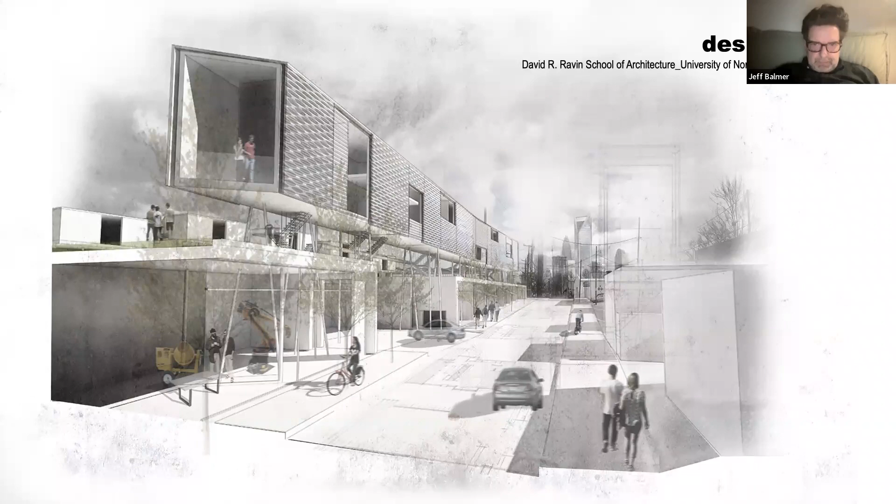Today we're going to hear from the Design Lab, co-directed by Chris and Peter Wong. Chris is a professor of architecture and co-director of the Design Lab. He's also president of the ARCC, and served as the school's director from 2009 to 2020. He holds a Master of Science in Architecture from Columbia and a Bachelor of Architecture from the University of Oregon. His research focuses on the mutually constructive relationship between environment and culture. Peter Wong is an associate professor who teaches architectural design, history, and theory, and has been here since 1988.

He's also a licensed architect in the states of Pennsylvania and North Carolina. He's the coordinator of the third-year studio these days, and received degrees from the University of Washington and the University of Pennsylvania. His current research investigates spatial perception in domestic interior realms, utilizing eye tracking hardware and software to reveal areas of visual attention in housing environments. The Design Lab was established in 2016 as a design research space in the School of Architecture, an extension of the school's curricular and community research efforts. It's a venue where faculty and students collaborate on innovative design issues aiming to advance contemporary professional, theoretical, and technical problems facing architecture today. Design Lab is supported by research funds and grants, and special collaborations that afford a variety of investigative projects, from housing to school design, and from competitive research to creative problems. A large part of its efforts is to generate design ingenuity through creative works such as competitions, lab projects, and published writing, allowing lead faculty and student assistants to collaborate in ways that combine the school's research and educational agenda.

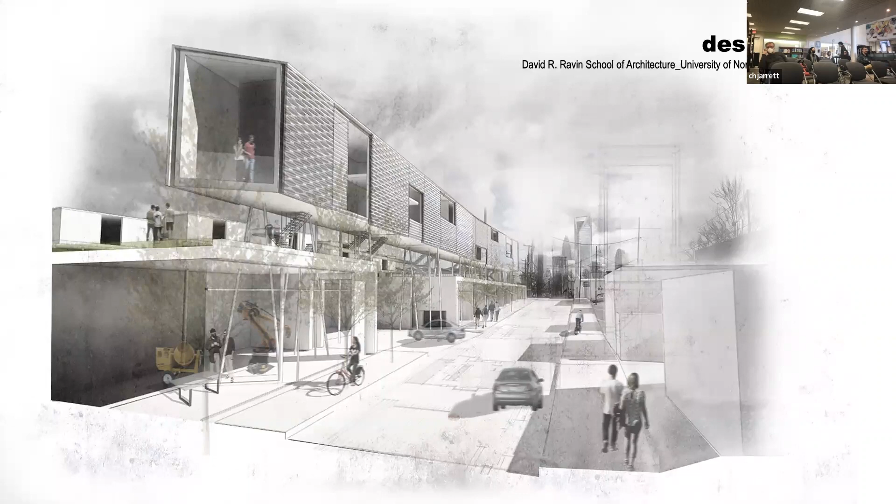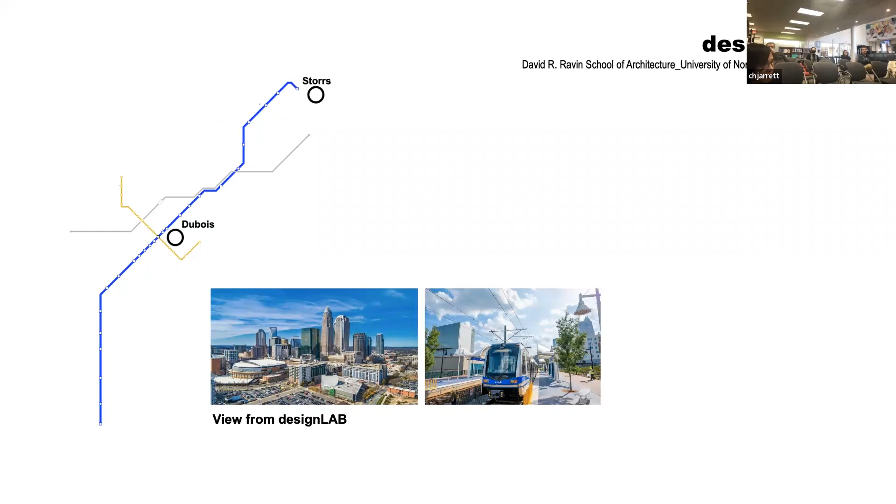The Design Lab is located 25 minutes southwest of Storrs via light rail at the Dubois Center, in the first ward in the heart of Center City. Design Lab is situated within the context of Charlotte, which is to say, for us, to be in the lab is to be in the city. We engage it as part of the culture of the Design Lab, from coffees and cheese sandwiches at 7th Street Market to exhibitions and film series at the Bechtler, to stouts at Alexander Michael's, or conversations with members of the board of the Foundation for the Carolinas.

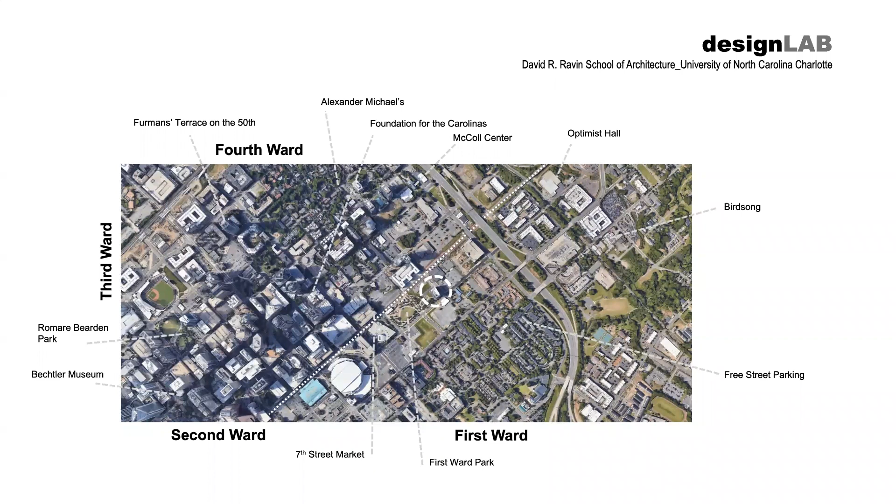Yeah, to Tostadas at Velvet Taco and walks around Romare Bearden Park. So being in the city, in essence, is an integral part of the Design Lab.

Designed by Kieran Timberlake Architects in partnership with Gantt Huberman, whose office was located just a few blocks away from here, the Dubois Center opened in 2010. From the beginning, 13 years ago, the School of Architecture has run studios, seminars, labs, and events on the 10th floor between students, faculty, and professionals. The Dubois Center is also home to SoA's Master of Urban Design program, City Building Lab, and the college's Projective Eye Gallery.

So there's a lot going on over there.

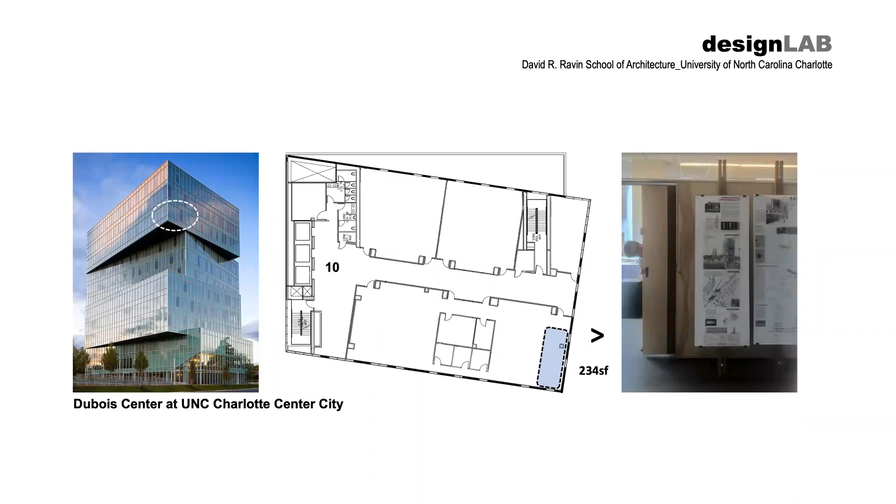The Design Lab is located at the southeast corner of the 10th floor, at a substantial cantilever where the forces of gravity are keenly felt daily. The Design Lab has employed over 20 students over the last 6 years to help us think through a series of design research questions and methods of inquiry as it relates to space, perception, surface, and materiality. These images illustrate the spirit of the lab and the conditions we've established for doing creative work, surrounded by books, computers, trace paper, cutting mats and X-Acto blades, basswood sheets and strips, chipboard and foam core, 5 types of glue, old models, new models, a fridge, microwave, coffee maker, a toaster, and most importantly, each other.

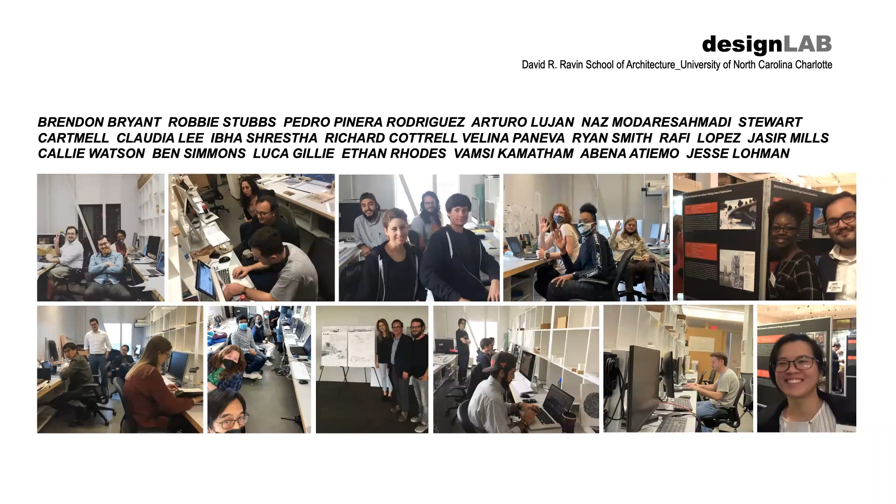Design Lab was established in 2016 as a design research lab in the SoA. The mission of the lab is to empower design as an agent of change to advance contemporary issues in architecture. We combine both theoretical and applied knowledge to produce innovative and speculative work.

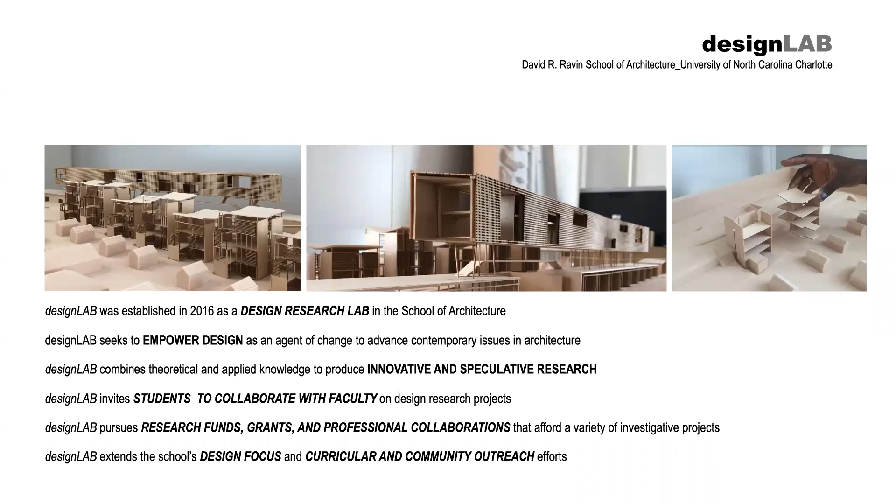The Design Lab invites students to collaborate with faculty on design research-based projects, as we'll share momentarily. And the lab pursues research funds, grants, and professional collaborations. The Design Lab thinks of itself as trying to extend the school's design focus and curricular and community outreach efforts.

Design Lab has been the recipient of awards from the Association of Collegiate Schools of Architecture, AIA Charlotte, AIA North Carolina, and AIA New York. We have a deep respect and appreciation for our ongoing collaborations with the Fab Lab and past collaborations with AIA Charlotte and the Housing Studio.

Predominant research areas of the Design Lab are affordability, modularity, sustainable materials, and spatial perception. These research subjects have been tested in the design of micro-modular housing, work, live, and multifamily housing and school design. The projects we have pursued afford us the opportunity to explore different building materials, including cross-laminated timber, pressed steel plate, recycled plastics, and more recently, micromaterials.

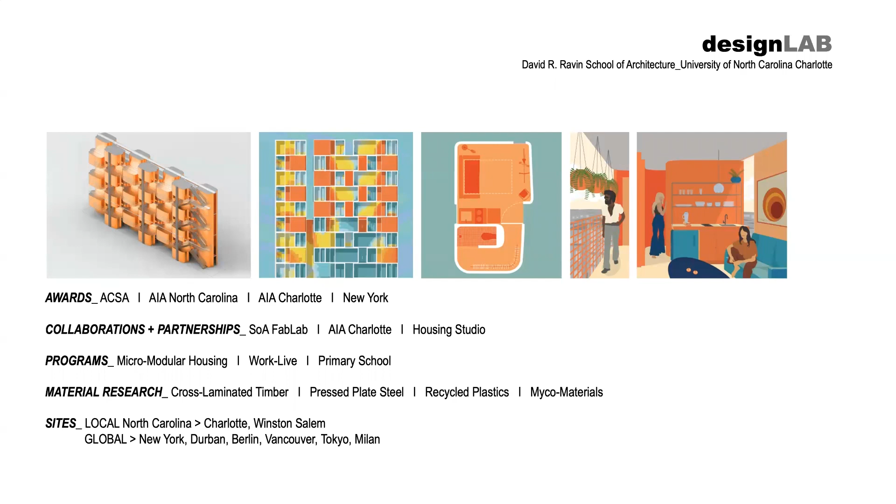The research interest of the Design Lab is tested with design projects that span between Charlotte and New York, Vancouver and Berlin, Milan, Tokyo, and Durban, among others. State, national, and international design competitions have often served as the venue for exploring and testing our ideas and research questions.

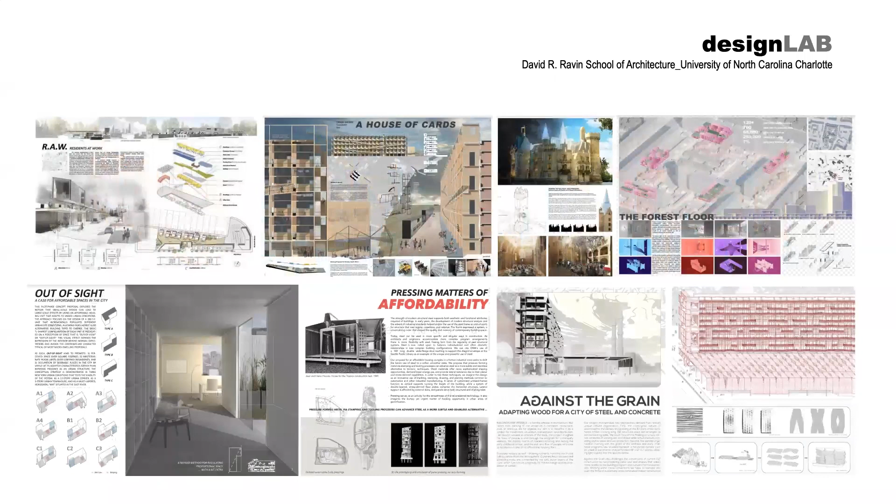So I'm going to go through now a few descriptions of some of the projects as a kind of backdrop to a little bit more in-depth view of a couple of projects that Peter will talk about.

The research that drives Residents at Work, or RAW, is what we refer to as flexible economics, where traditional market rate models of development are financially and spatially rearranged, flipped, and folded to drive greater degrees of social, demographic, and economic diversity. We envisioned RAW as a counter project to the ill effects of gentrification and homogenization run amok in Charlotte and cities across the US.

Our research on flexible economics is tested in a design proposal for a mixed-use residential, industrial, urban community that, one, permits families to lease backyard rooms while promoting an alley urbanism composed of small-scale garage-like units. Two, permits small business owners the option to lease their elevated lofts above a commons terrace as part of empowering a maker network of small businesses along a historic industrial corridor south of downtown Charlotte.

Our research on lightweight pressure forming metal through stamping and tooling process — this is Pressing Matters — is explored and tested in the project Pressing Matters. Sheet metal is lighter and more form flexible than hot rolled W or I-flange steel, with low energy demands, relatively speaking, in both manufacturing and transportation, with greater degrees of lateral resistance.

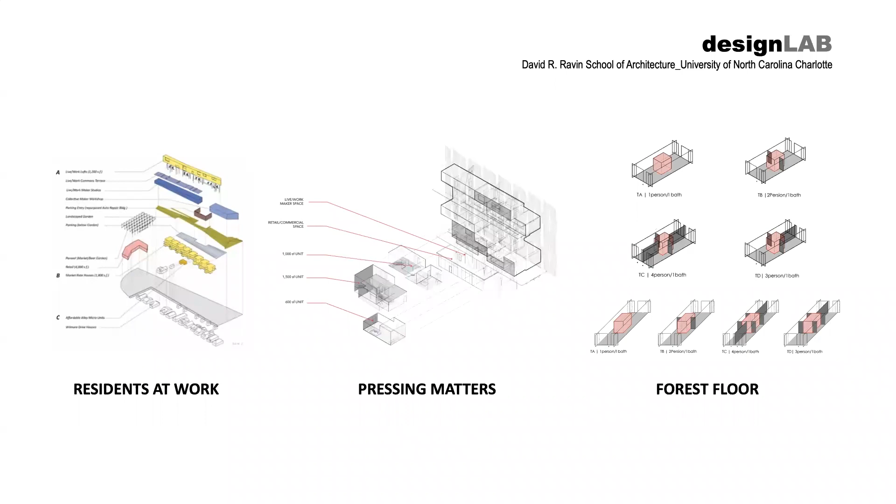Pressing Matters exports methods of blanking, stamping, drawing, and piercing used in the automotive industry for the design of customized unitized metallic frames composed of double-layered skin floor plates and continuous vertical supports. In contrast to the universalizing order of the modern steel frame that shaped 20th century construction and gave rise to an increasingly homogeneous built environment, Pressing Matters examines the potential for a more differentiated, individualized, softer, smoother, and more subtle use of steel in architecture.

Out of Sight examines the provision and notion of affordability in the city. This project explores the idea that small-scale design can lead to large-scale effects. Here, the approach focuses on the design of a 280 square foot unit that populates different urban site conditions, allowing familiar but also alternative building types to emerge.

The basic L-shaped configuration of each housing unit in this proposal is predicated on a perception of space that is out of view or out of sight. The visual effect expands the impression of the interior beyond normal expectations and avoids the container-like character typical of most micro-housing models.

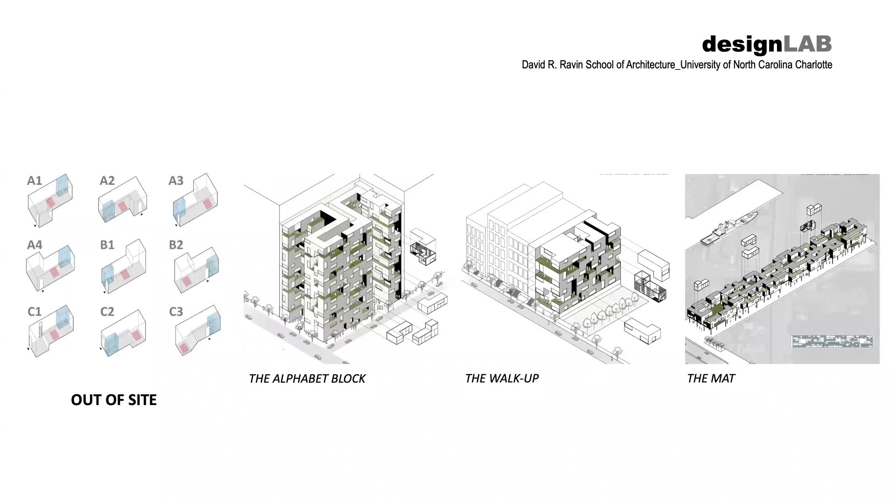As such, Out of Sight promotes perceived space over square footage, indeterminate room limits over confined boundaries, and occupation of desirable places to live in the city by virtue of its adaptive characteristics. The conceptual strategy is demonstrated in three New York urban conditions that test the viability of the system: as a 12-story urban corner, as a 5-story urban townhouse, and as a multi-layered horizontal mat building seen here in the East River.

Research on the indigenous plank house inhabited by the Coast Salish peoples of the Pacific Northwest unveils a social and spatial construct defined by its flexibility, linearity, adaptability, and free plan. These indigenous houses included textile partitions and decorated columns, and drove the design of a contemporary low-rise affordable housing project in Vancouver. A linear, flexible, adjustable wall serves to accommodate a range of living, working, and subleasing conditions, able to adapt to changing lifestyles and economic circumstances.

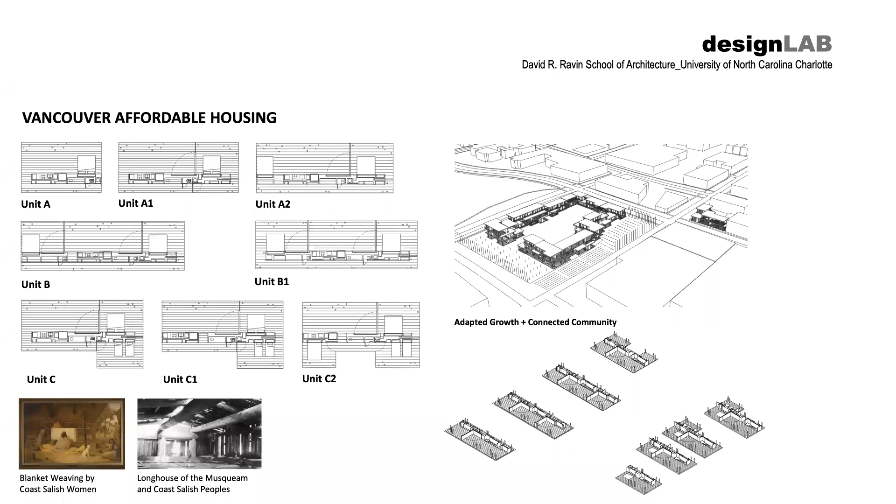Research on Danish barns and traditional farming practices of the Øresund region outside of central Copenhagen drives an environmental design model for a new primary school founded on the principles of learning by seeing and learning by doing. Central to the research was the study of cross-laminated timber panels made of Norway spruce to enable column-free floor plans for maximum adaptability. Traditional classrooms have been transformed into collaborative child-scaled makerspaces, or what we call plyvillions.

The makerspaces are composed of open daylit rooms offering framed local views of edible fields and free play areas. Below ground are dark cavernous quiet spaces with nooks, cubbies, and compartments for day packs and coats, offering children personal space to read a book, write a story, or take a nap.

Shared educational, social, and administrative functions are collected in a high-tech tower, or what we call a skyscraper, where digital tools are promoted to advance child's education while providing children panoramic or global views of the city to better understand Copenhagen and its place in the natural world.

The makerspaces and tower are connected through a field condition conducive to farming practices and play, and 2 meters below grade is a geothermal loop to move heat to and from the plywood pavilions. Here, D-School is proposed as the new unschool.

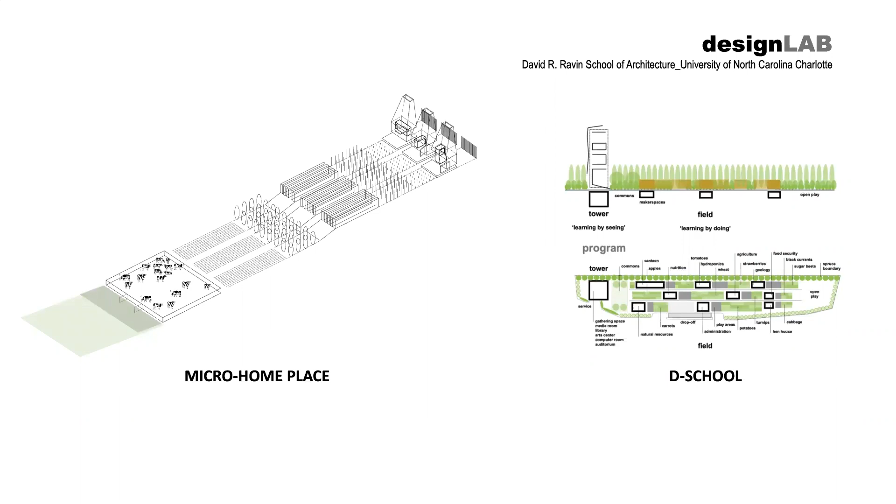Inspired by Gordon Matta-Clark's Fake Estates, which mapped odd lot sizes due to surveying errors in New York's 5 boroughs, or Atelier Bow-Wow's Pet Architecture, an account of small, almost impossible to build remnant sites in Tokyo now thriving as ramen bars, nail salons, and single-person-wide convenience stores, Mod Pods recognize the inherent constraints of infill sites by capitalizing on their unique properties and locale.

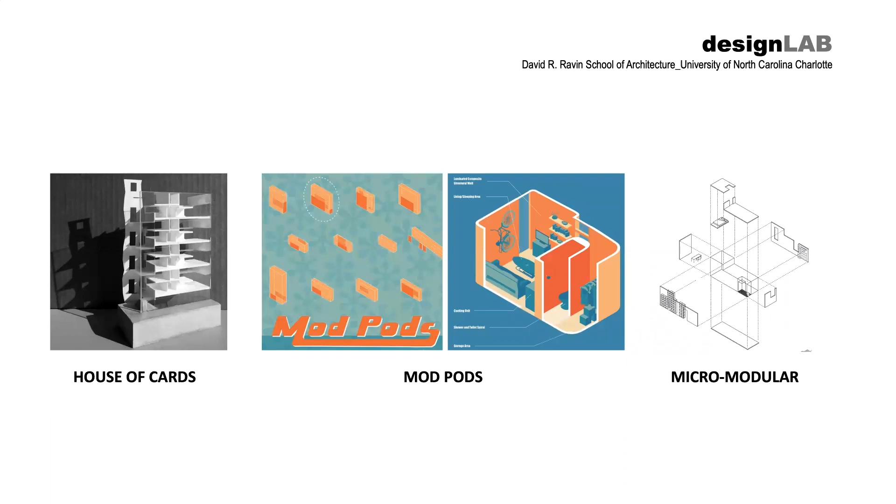Micro-modular housing examined prefabrication and assembly systems.

Much of this work has been influenced by Peter's ongoing research in spatial perception, employing eye tracking techniques to study how people perceive, understand, and use space, which we will see in a bit more detail in a few minutes.

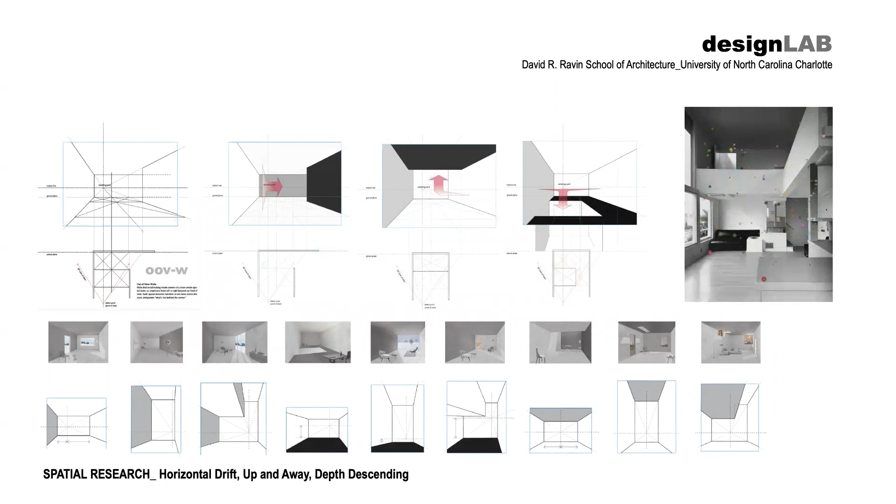The DesignLab is also the source of design scholarship. Examples here include the publication of peer-reviewed papers that examine, on the left, notions of vague space—that is, spaces which move beyond our field of view, across wall planes and behind edges, spaces that have no apparent closure. And on the right, spatial and constructional analyses of 7 Alexander houses in Coachella Valley, designed by architect Donald Wexler in the early 1960s, each a modest 1,400 square foot house composed entirely of all-steel prefabricated components and surfaces that are durable, lightweight, easily transportable, low maintenance, and dimensionally economical.

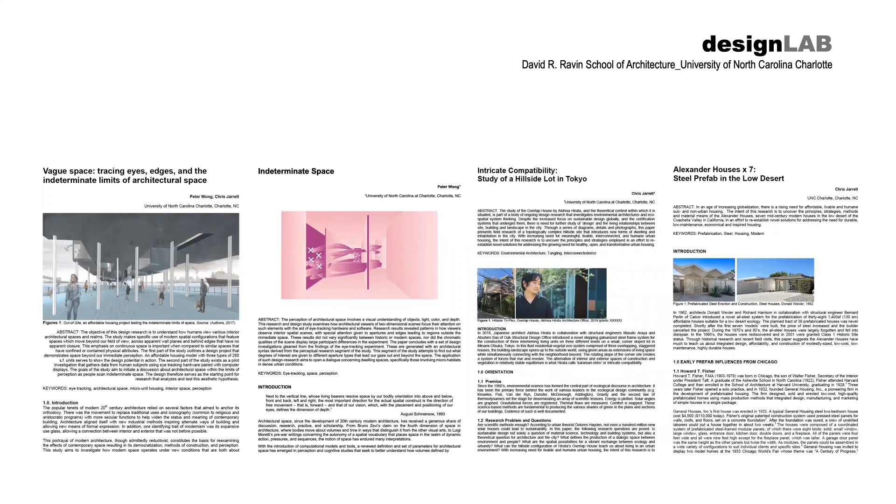So we're going to segue now and talk about 2 projects from the DesignLab with a little bit more detail about each of them. So, Peter.

Very good, Chris. That was a nice summary of the things that we've been trying to do in the lab. I think just to reiterate, it's been important to have the students' assistants involved. They've been, of course, the kind of backbone of a lot of the investigations that we've done.

And also one of the foci of the lab is to see that projects, design projects, which we loosely try to define as design research—maybe different than applied or intellectual research—act as the vehicles that allow us to study this.

So we would like to say that we're expert at something. And at the same time, we feel like there's expertise out there that are very important from a contemporary point of view with regard to architecture today, particularly climate crisis, affordability, as well as a kind of perceptual research that's taking advantage of new digital hardware and software, that we feel the architectural design project, in a different way than in the past, has allowed us to investigate an integrated approach.

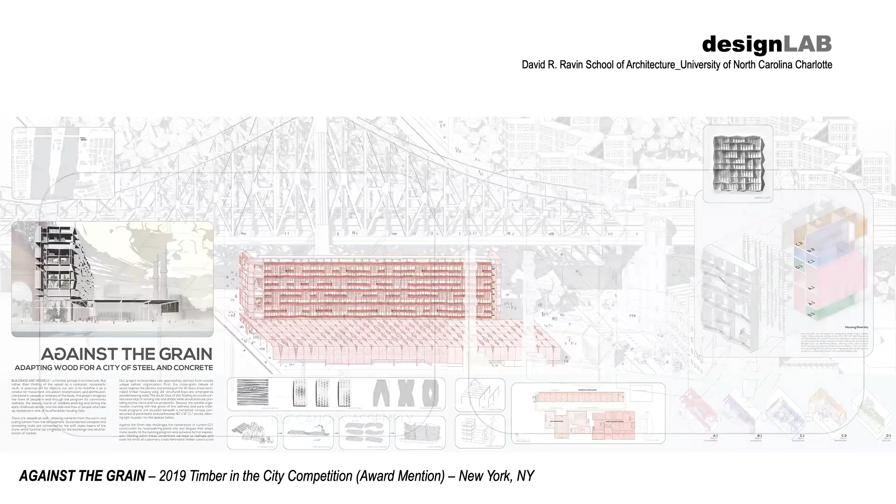The three things were sustainability through material use, also affordability—you'll see that in different size units we've designed—and also the challenge with the material itself, trying to upend and challenge the way CLT is commonly used.

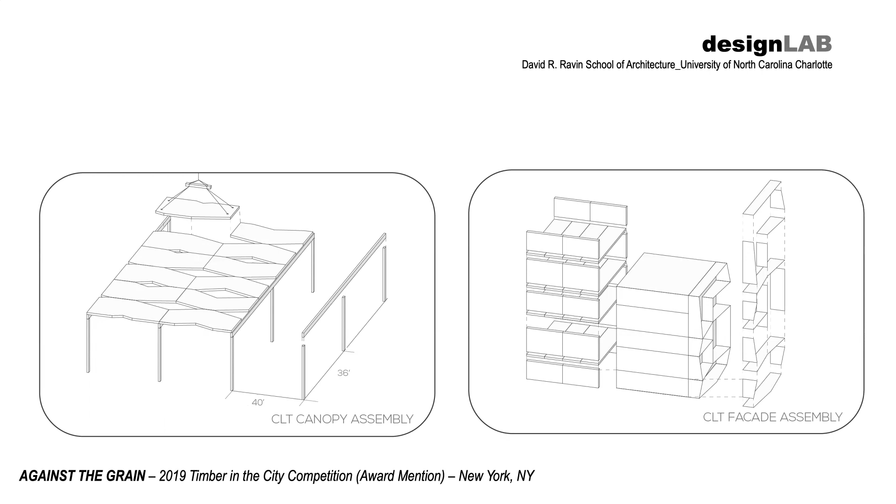In this particular case, looking at the vertical on the right, as well as its horizontal use on the left, we attempted to accept the standard panelized condition and also think about it as the potential for it to be carved in a different way.

The panel conditions can span and at the same time admit light on its horizontal surface. We played around with different kinds of patterns for the horizontal health clinic and early childhood development center to make a canopied roof that utilized this heavy timber system with CLT planking on top.

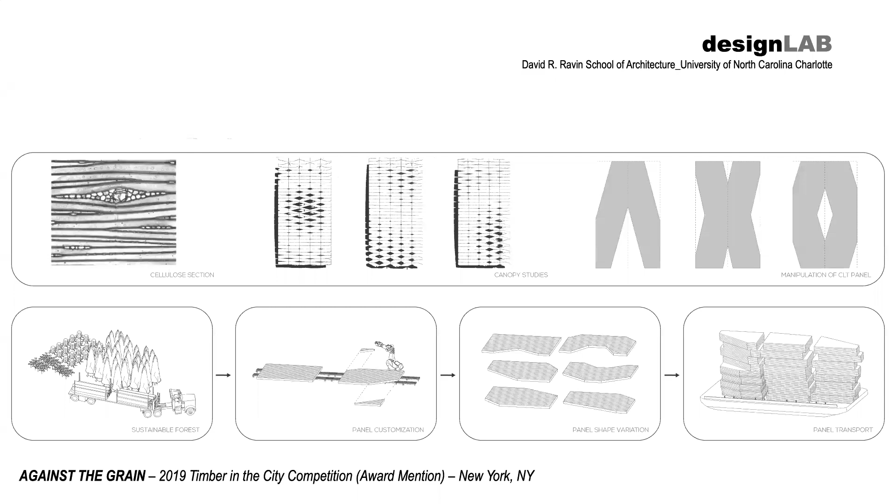There's a slight reference to the way cellulose is formed, but in the end that's only a pure analogical relationship. We wanted to dive a little deeper into that through its construction purposes.

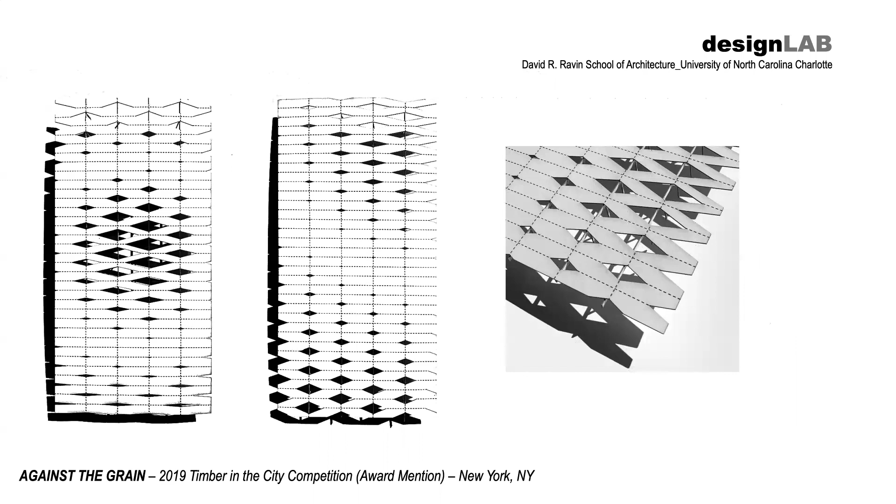So the panelization is familiar and at the same time cuts across the grain of contemporary current CLT practice. The same was true with the way we thought about the load-bearing capabilities of the slab structure, which demanded a kind of 6-level vertical integrity.

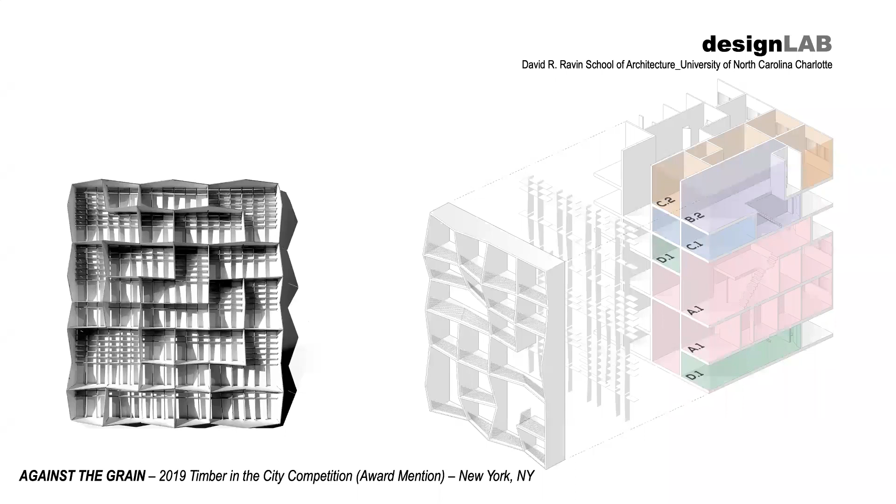These were used as party walls, as well as an outside skin system facing south that could also be cut in a similar way to create the balconies and the kind of vertical sun screens for the apartment units.

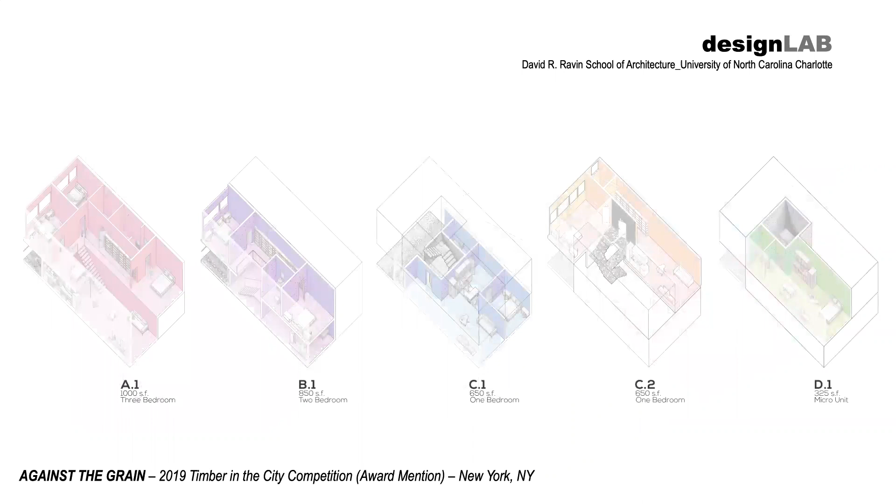The units themselves are part of the affordability issue. We presented 5 different scaled and sized units, based on a single loaded corridor model where units could be single flats or double multi-level units depending on the size. They're a little difficult to read, so let's see if I have another image.

They're based on a 16-foot module that then gets doubled with a center core stair. So it has some homage to Robin Hood Gardens in a different context by the Smithsons, trying to utilize that multi-leveled

front to back kind of ventilation capability, so it's very different than the apartments we see today built in Charlotte, where you have a single corridor in the back, pretty much dark, then bathrooms, kitchens, then all living spaces on a single exposed wall.

And so we were trying to utilize the historical examples by the Smithsons to try to recover that.

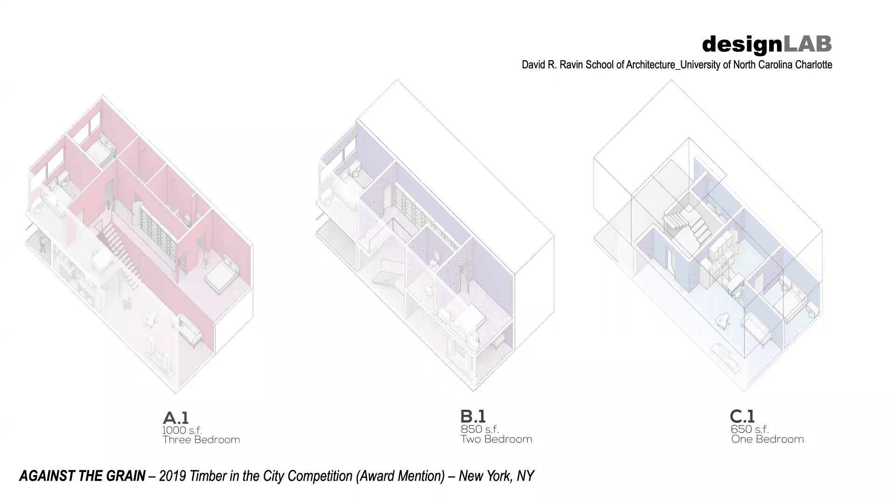So that was in that particular project. That was a mention award out of, I think, around 70 to 100 different projects.

This is the most recent project, completed for the Berlin Affordable Housing Competition at the end of 2021 and beginning of 2022. This was an interesting project. You think about the city of Berlin, its immigrant and refugee population, in conjunction with, of course, its history post-war.

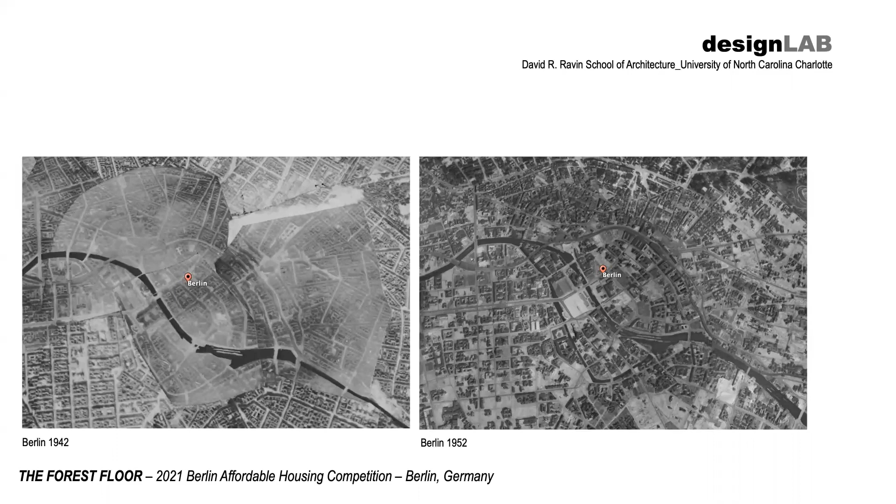These two images show the kind of perimeter block scheme before the Allied bombing, and then 10 years after, you begin to get a sense of the overall block destruction and clearing that occurred. And what that cleared the way for, as Berlin became divided, was the new Soviet model, the new international architecture model of building Europe, which the Soviets took on in full extent.

So we see basically the Corbusian tower, the kind of Ville Radieuse, in that sense, the use of the land. And many of the sites in Berlin still exist that way.

And the idea was, well, how do you increase the density in Berlin? Perhaps using a different model, but at the same time taking advantage of that leftover space, which was typically left for parks and greenery under the positive kind of Corbusian manifesto, but ended up being parking lots.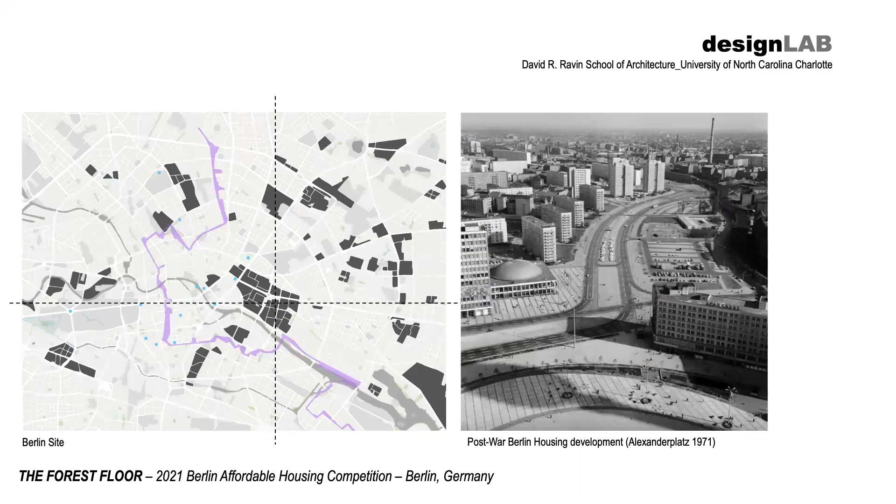So what you'll see here is the demonstration block in this location, on the former east side, with the Spree moving through. And the grid of columns represents the pattern of the housing model, which is based on a 16 by 40 foot module.

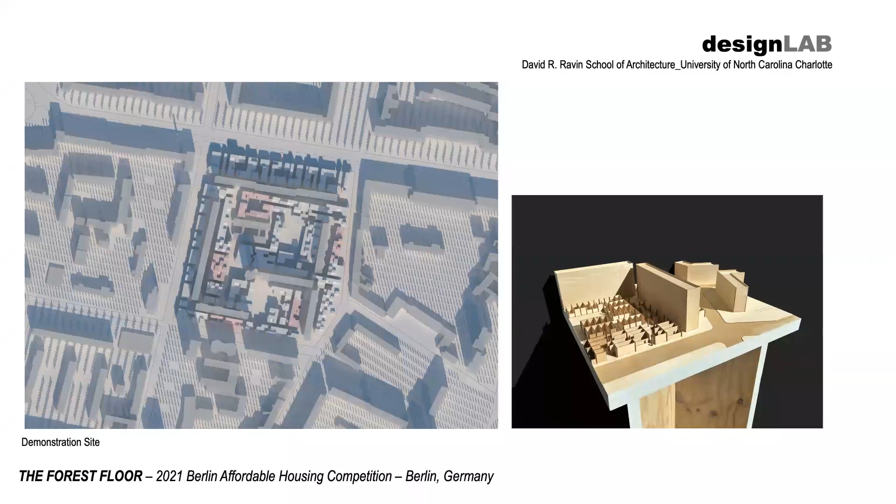Utilizing CLT and also heavy timber construction. So this is the floor that's referred to, and building the new kind of figure ground amongst the existing towers was the goal.

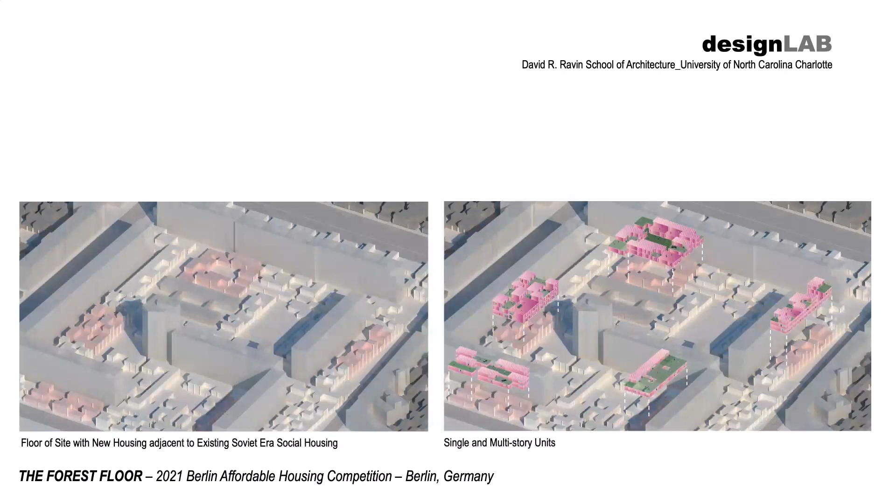And so this shows how that may occur, with some details of the sketch kind of diagram of the model units that would then occur, all CLT.

Part of the research, as Chris mentioned before, was with eye tracking. And what that kind of psychoneural research involves is allowing us to understand these efficient spaces in a different way, with regard to their expandability, their limitlessness in the field of view.

And the way these are designed, which is also facilitated by the construction system using CLT, is the idea that spaces beyond our field of view, the spaces that are out of sight, which we referred to in the earlier project, are in fact a means of inciting an expanding interior that, on a psychological level, allows us to inhabit smaller spaces in a more expansive way.

That is, it's possible through visual perception, through the health of our mind, to think about small spaces as acceptable if we design them in a way that makes them feel larger.

And so eye tracking allows us to assess that. We don't know whether or not people are actually thinking that the spaces feel larger, but we know that where they're looking indicates that there is an interest.

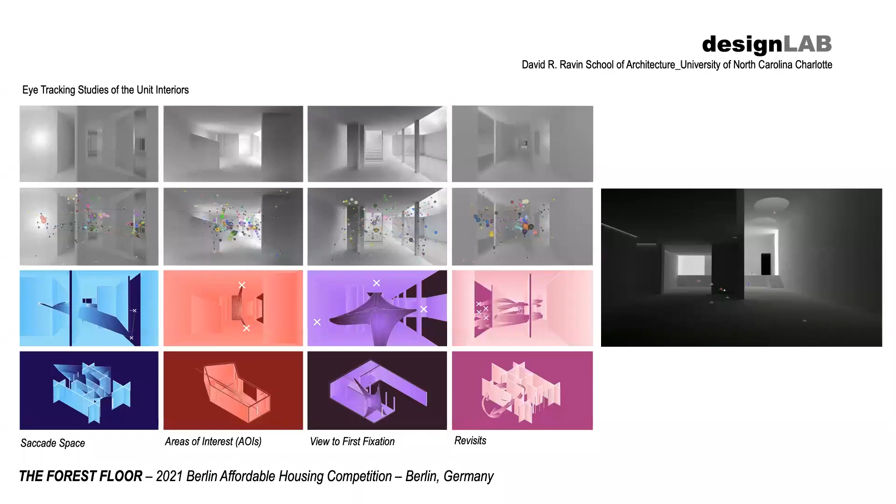So the units were designed with similar effect. The planar quality of the architecture allows us to capture this kind of indefinite use of space. By the way, we don't make punched openings so that rooms are cells, but they're kind of implied openings with the use of window walls and also opaque heavy timber walls.

So these are the different unit sizes, very similar to the last project. We can go into detail, but maybe we can just save that for discussion.

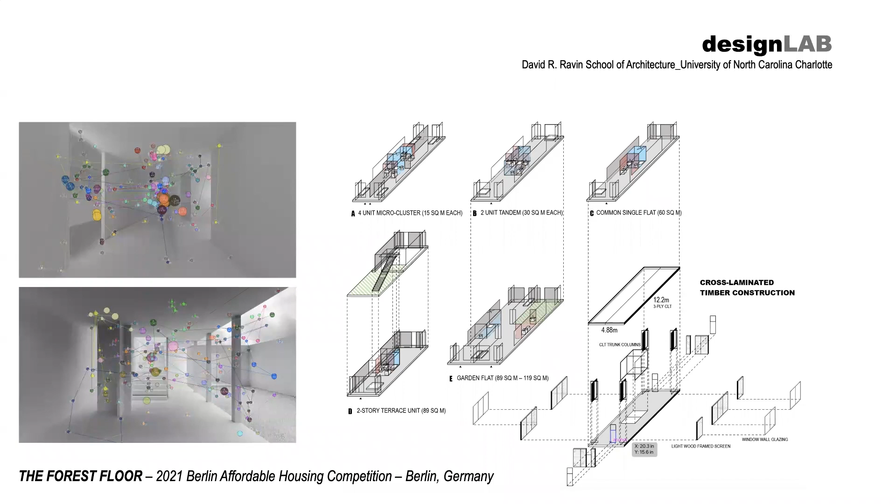These are the kind of diagrammatic models that show us how the forest floor operates. You can't really see it in this photograph, but we have the model here to show you the system, but at the same time, the ability to create a diversity of units within that particular system. So right now you're seeing two levels of that along with the courtyards.

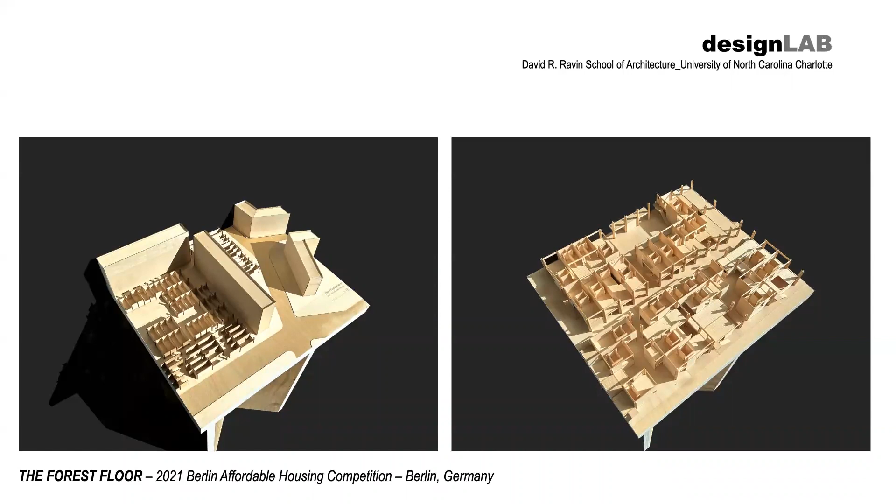As Michael Green says, we're at a unique moment in architecture and building engineering history when shifting world needs have asked us to question some of the fundamentals of how we have built for the last century and how we build in the next. Wood is the only major building material we use today that is grown by the sun. When harvested responsibly, wood is arguably one of the best tools architects and engineers have for reducing greenhouse gas emissions and storing carbon in our buildings.

Looking at housing as a kind of programmatic type allows us to think about the extensive use of that. At the same time, the issue of affordability and the scale of this housing, and the means by which diverse populations and socioeconomic groups can access those, is also important, in addition to the environmental issues afforded by the ecological use of these materials.

So with that, we can open it up to questions.

I will monitor the chat. Yeah, there's like seven comments, but they don't show up on your laptop, so you have to do it. Yeah.

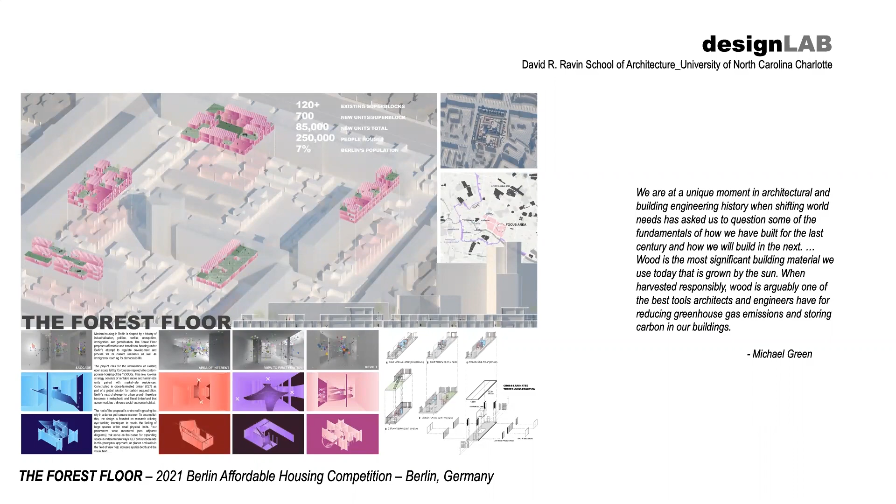I think one thing also to iterate in the bigger picture is that the design lab is trying to be situated somewhere between the academy and practice. Part of meeting that goal is a function of being where we are. But also, we operate the lab as a kind of atelier and a small practice, giving students exposure to that, which is a little different than how they might operate in the studio environment. I think maybe there's a discussion with respect to the labs in the School of Architecture or the college at large, and how this is situated in relation to different kinds of labs that the school has. I don't know if that draws any questions, but I'm just throwing that out there.